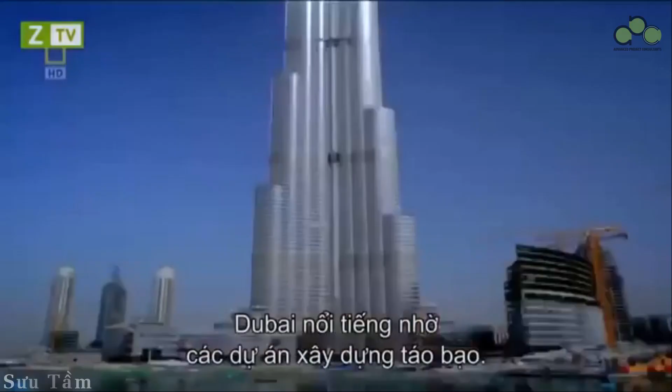Dubai is famous for its audacious engineering projects. But now, its neighboring city, Abu Dhabi, could surpass them all. This is Capital Gate, the most inclined skyscraper on the planet. It defies gravity, leaning at almost 5 times more than Italy's Leaning Tower of Pisa.

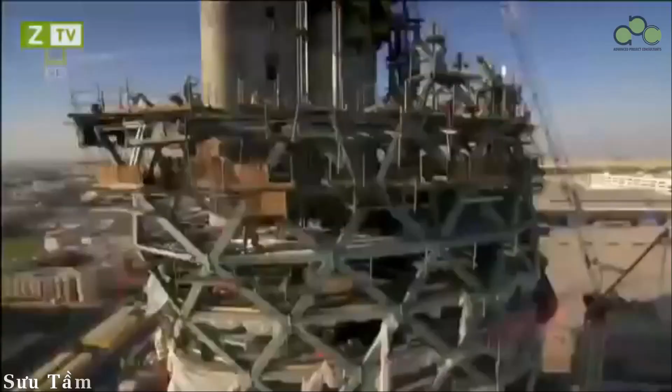To make it stand up, it'll take some extraordinary engineering that could rewrite the skyscraper rulebook.

Situated on the edge of the Persian Gulf lies the Sheikhdom of Abu Dhabi. It's the largest and richest of 7 states that unified in 1971 to form the United Arab Emirates. Abu Dhabi is undergoing one of the biggest makeovers of modern times.

Its ruler, Sheikh Khalifa bin Zayed Al Nahyan, wants to join the City Super League. And he's spending over $200 billion to transform his capital into a world-class business and tourist destination. He's already spent a reputed $3 billion creating the most expensive hotel ever built.

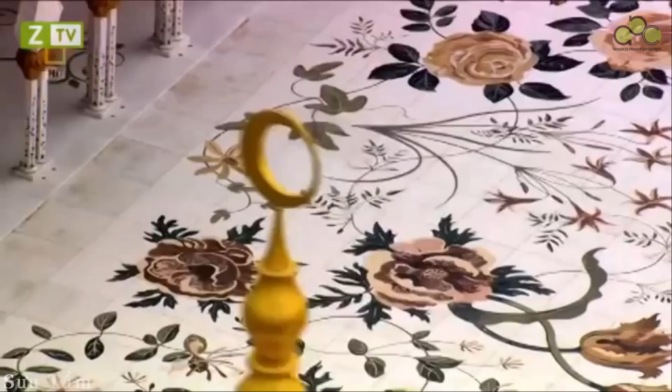The Emirates Palace boasts 114 gold domes and is the height of luxury, where rooms cost up to $12,000 a night. And that's not all. He's built one of the largest and most opulent mosques on earth. Capable of accommodating 40,000 worshippers, the Grand Mosque boasts the largest carpet on the planet and the world's biggest gem-encrusted chandelier. But even these structures have not quenched his thirst for the extraordinary.

Now, the Sheikh wants a building so spectacular it will instantly become an international symbol for Abu Dhabi. The man appointed with the task of delivering this architectural icon is the Sheikh's cousin, His Highness Sheikh Sultan bin Tahnoon Al Nahyan. Architecturally, it will be a unique building, positioning Abu Dhabi as one of the cultural hubs around the world, and architecture is part of that overall inspiration and art.

It's a tough challenge. This is a land where extreme engineering is the norm. Neighboring Emirate Dubai has already built the world's tallest skyscraper, the 828-meter-high Burj Khalifa, and an iconic luxury hotel, the Burj Al Arab. Sheikh Sultan signs up a team of architects and gives them a clear brief, not to go bigger or taller, but to challenge the rules of architecture.

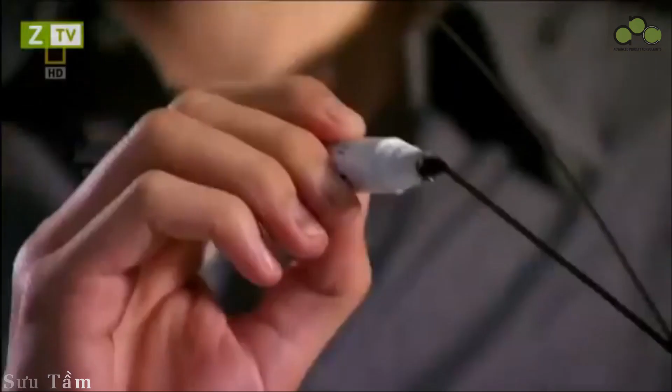The architects look for inspiration in Abu Dhabi's landscape. They find it in the wind-swept dunes and the rolling waves of the Persian Gulf. We took this idea of wind and water, which are both dynamic, fluid type of rhythms of nature, and we said, how can we capture those in time? As a result, you get a much smoother phase. I was really very happy when we first saw it, because with such a building, you can get the first impression from the first few seconds.

The team come up with an extraordinary design. A tower that spirals out of the ground to 160 meters, inspired by a desert whirlwind and the splash of a wave rising over the sand. This gravity-defying skyscraper tilts almost 5 times more than Italy's Leaning Tower of Pisa. No single angle of this tower is the same as another. It's a structure guaranteed to amaze.

We really wanted this to happen. They could see a vision suddenly. They could see something that would stand for them. Then there was no stopping us. Sheikh Sultan wants the lower floors to become the most prestigious office address in Abu Dhabi, with the top 18 levels assigned as a 5-star hotel fit for royalty.

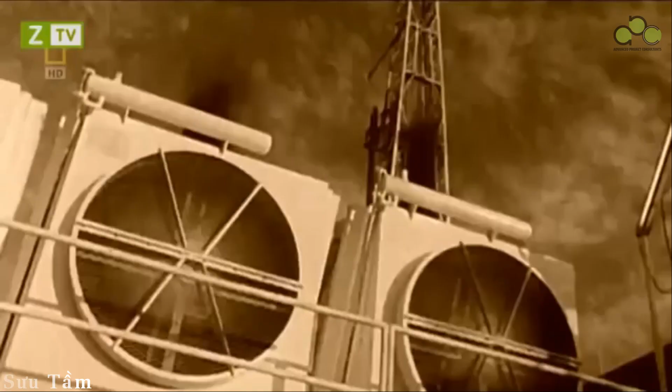Over the past 50 years, this land has experienced extreme change like no other. The discovery of huge oil reserves in 1958 set the wheels of progress in motion. Abu Dhabi's ruler Sheikh Zayed had a vision to unify the sheikhdoms and secure their financial future from Western dominance. He then set about using his black gold to create a city that rose out of the desert.

Today, Zayed's legacy is all around, and now his son wants to leave one of his own. To transform Abu Dhabi once again, but this time to put it on the world map. Sheikh Khalifa plans a new $2 billion business district called the Capital Center, situated alongside the Middle East's largest business hub, the Abu Dhabi National Exhibition Center. It's the ideal location for an architectural icon. And inspired by its location, the new tower is named Capital Gate.

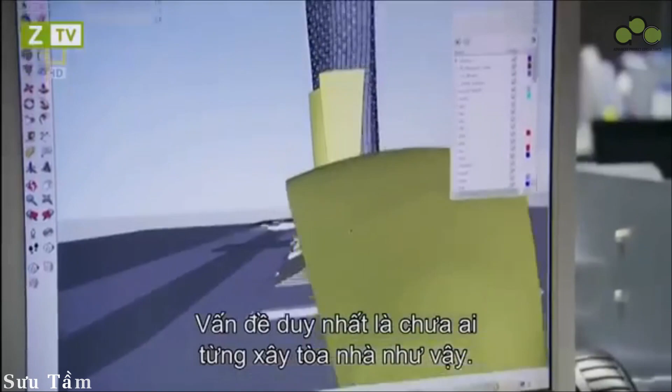Now, the idea must make the leap from the drawing board to the construction site. The only problem is, no one has ever attempted a skyscraper like this before. Everyone realized that this is a crazy structure to build, and how are we going to build it?

To make Capital Gate's gravity-defying design a reality, it'll take some extraordinary engineering, and the challenge begins on day one. Its top floors overhang its base by 33 meters, creating huge forces that want to rip the building's foundations out of the ground.

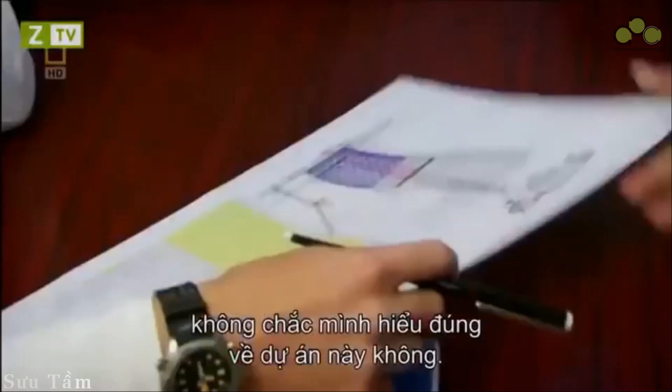At the construction site, project architect Tony Archibald is daunted by the task ahead. When I first joined the job, I was shown the drawings, and I kind of did a double take, and I wasn't quite sure that I got the correct understanding of the project, and it took me a few moments before I realized what we were about to undertake.

Keeping Capital Gate upright is a huge engineering challenge. There isn't just one solution. To overcome the forces of gravity, it will take a whole range of pioneering techniques. But the task starts with the foundations, deep underground. On one side of the building, the weight is going down into the ground. On the other side, it's being lifted out of the ground. And that's due to the large overhang that we're having to deal with.

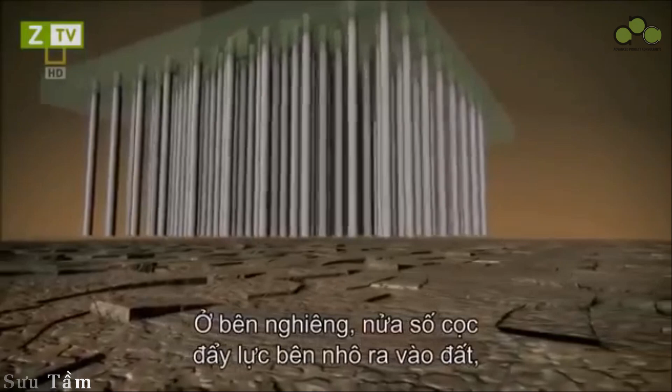The solution requires almost 400 concrete piles that work in 2 different ways. On the leaning side, half of the piles push the overhang's forces into the ground. On the opposite side, the remaining piles anchor deeper into the bedrock. They resist the stretching forces, trying to wrench the building out of the ground.

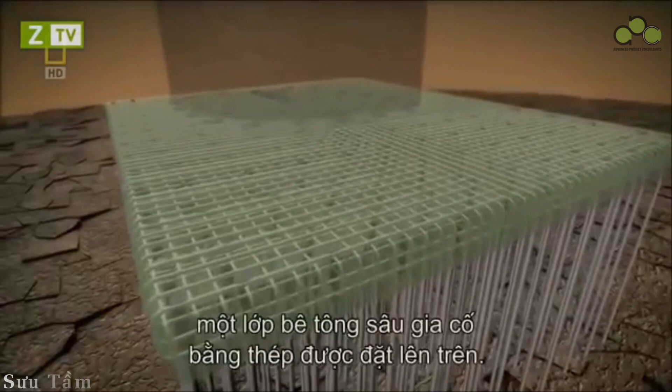Finally, to evenly distribute Capital Gate's forces into the piles, a deep concrete slab reinforced with steel is laid on top. What the foundations taught us is that every single aspect of this building has to be custom engineered.

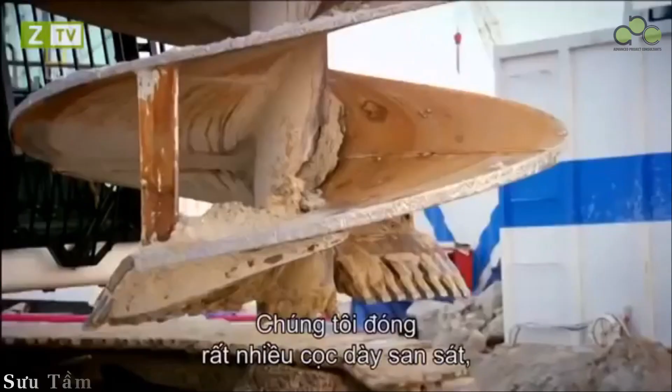Excavators dig out a colossal 6,000 cubic meters of sand. And over 8 weeks, hundreds of piles are driven into the ground. We had an awful lot of piles to put in a very close proximity. It was a real difficult challenge. There can be no let-up on this schedule. Sheikh Sultan wants Capital Gate complete by an impossibly tight deadline.

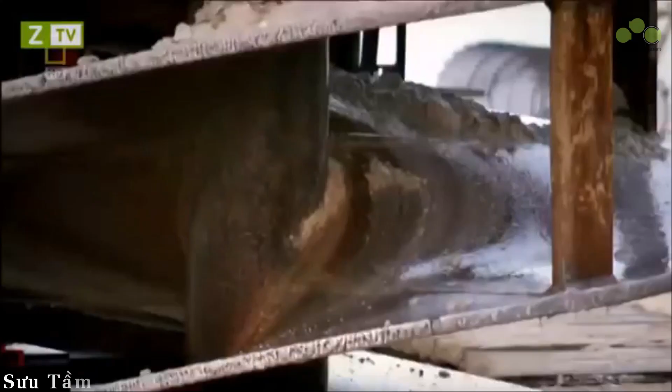With the foundations finished, building above ground can begin. But because of the dramatic lean, it will have to be constructed in a very different way to a conventional skyscraper. We realized once we'd done the foundations that this was going to be the first of many difficult problems. A normal skyscraper requires a solid core to hold it upright. But Capital Gate's curves will just crack and topple a standard core. Engineers must discard conventional thinking and devise a way to defy gravity.

Inspired by the nearby desert landscape and its wind-shaped dunes, architects have designed a curved leaning tower. But it'll take some audacious engineering to stop Capital Gate from falling over. Normal skyscrapers are built around a slim vertical core, which helps to channel the building's weight into the ground. There's so much overhang on this building, a conventional core, there was no way it was going to work. You just can't build a straight core. It's just not strong enough.

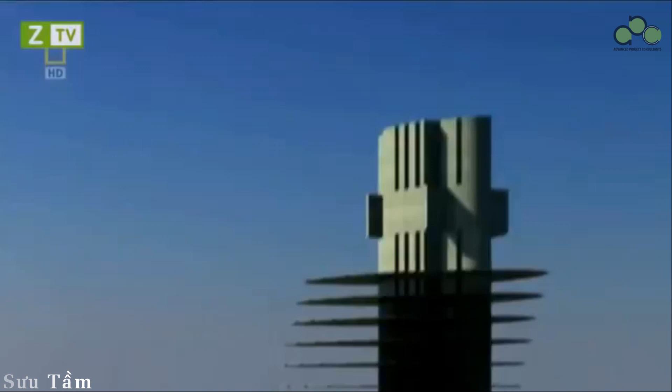Capital Gate's design would cause a conventional core to bend dangerously. The pull of the massive overhang wants to stretch the core on one side, causing the concrete to tear apart.

Structural engineer Mona Vassi knows it's a serious problem that must be solved. When I saw this one, I thought it's impossible, it's not going to work. It's just some sketch, somebody left it somewhere. But I always think that for the architects, it's easier for them to just draw something, but it's not easy for us to fulfill or satisfy their need.

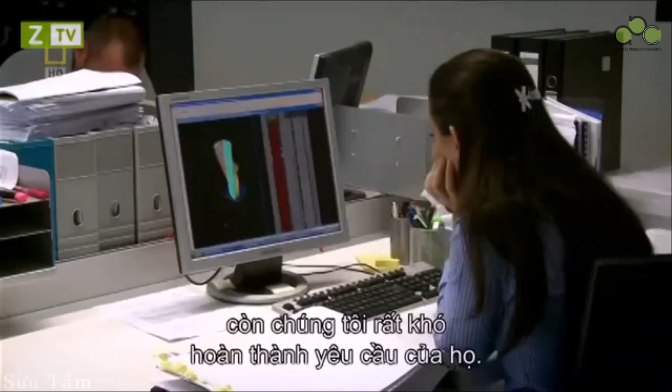The engineers developed 2 groundbreaking solutions. The first part of their plan is to build the core with a curve, bending in the opposite direction to the building's lean. As the structure grows, its weight pulls the core straight. In total, it shifts 350 millimeters, and the effect is significant. The concrete that would have been stretched by the overhang's pull will now be compressed and strengthened.

You build it bent, and then as you add the slabs to the upper levels, it pulls it back into vertical. So basically that whole vertical core is in compression, and that gives it immense strength.

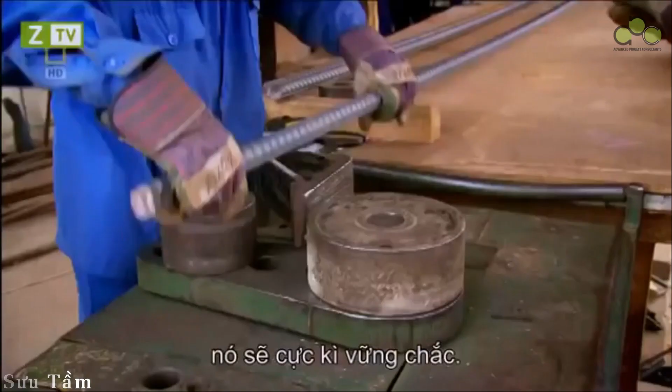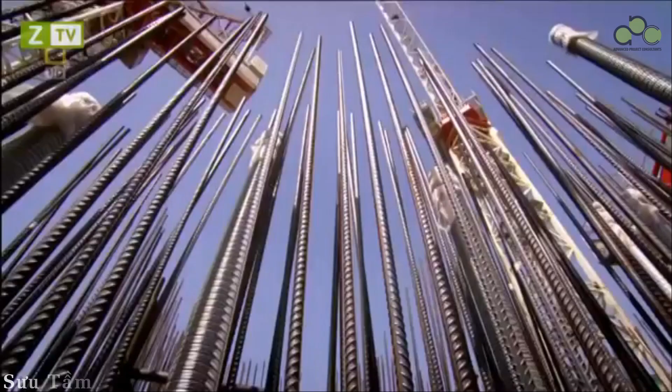The core grows 4 meters a week, and construction manager Les Fairchild is in charge of building it. This is probably the most complex core that I've come across. It's built at an angle, and effectively the core holds the whole building up. The core is built using a technique called jump forming.

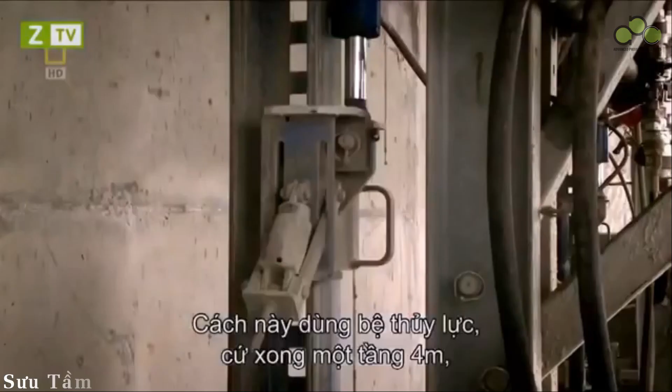First, a dense mesh of steel reinforcement is assembled. A mold then closes around the steel to form the shape of the core. The steel mesh is then filled with concrete. Then the mold or form can climb up the core wall for the process to start all over again. Jump form is a hydraulic platform. Once we've cast each 4-metre level, we simply attach it to some runners and we jump it hydraulically up to the next level.

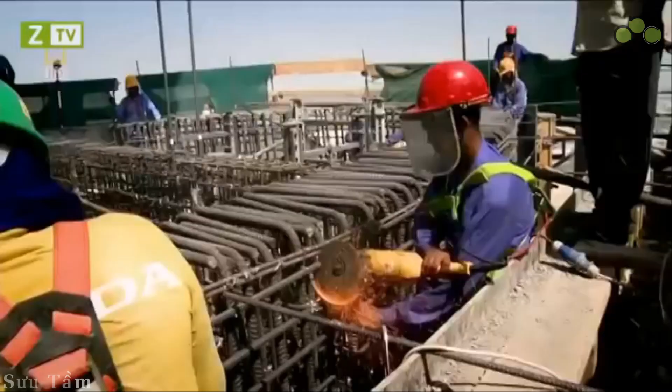The core will be strengthened as it straightens. But for the core to carry extreme loads, the concrete must be reinforced using steel rods called rebar. The rebar is installed during the daytime, but temperatures of up to 50 degrees Celsius and concrete don't mix. It dries too fast and could crack. To set at the right speed, the concrete has to be poured during the cool of the night.

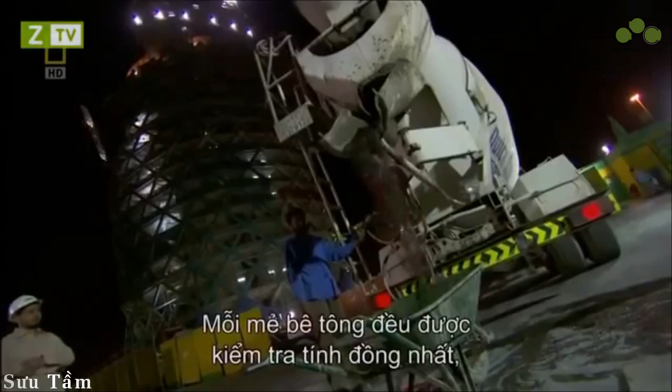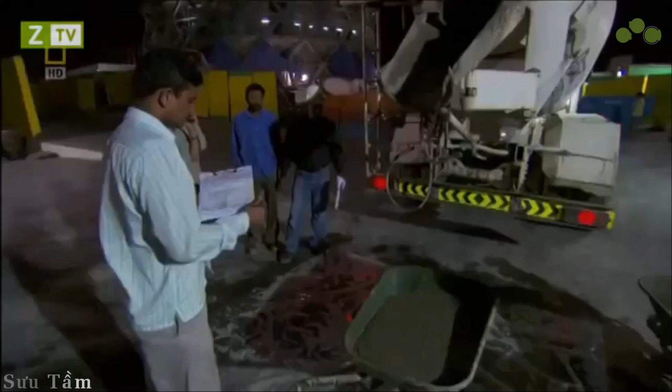As the core grows higher, the liquid concrete has to be pumped over longer and longer distances. So the consistency of every batch is first checked in a slump test to ensure it won't block the pipes. When you first see it coming out the wagon, you can usually tell whether it's a tight mix or whether it's a loose mix, and that's what we're testing for really in the slump test. We simply make a cone, lift the cone off, and depending on how much it reduces in height, tells you exactly what the slump is. The one we just witnessed is 215 millimetres, which is within the specification, so that's good to go.

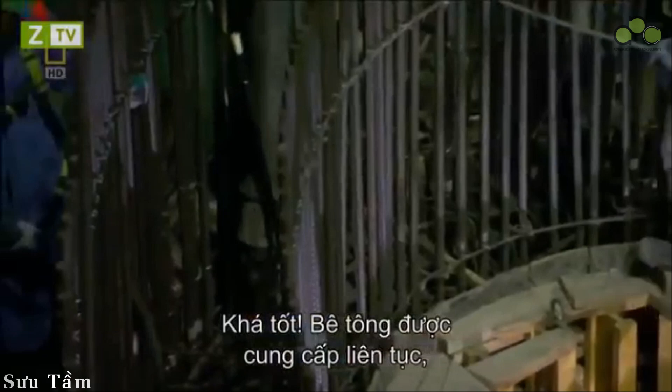Whilst the truck drives to the pump, Fairchild needs to get onto the core. He can take the stairs, but 90 meters up is a long climb. He knows a much faster way. Crane lift. It's going fairly well. We've had a nice continuous supply of concrete, and we're now pumping it up to the upper levels of the building. And the lads are just steadily working away. They actually work from one side to the other in metre deep layers, so they're doing everything right. It's always exciting when we pour concrete. It means it's another achievement really. We're going up another level.

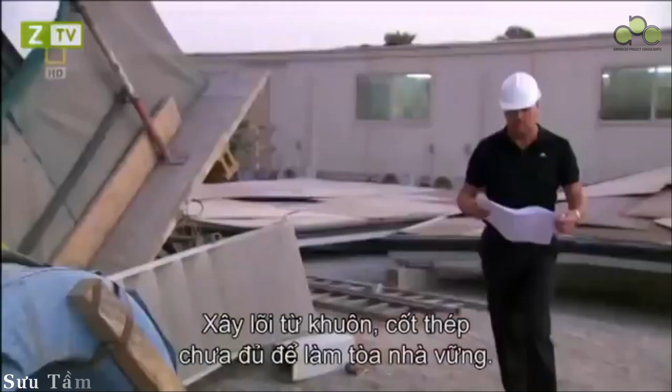But building the core out of alignment and packing it with rebar still isn't enough to stop gravity toppling Capitol Gate. What we came up with is a post-tensioning solution where we introduced much more reinforcement into the core wall and then used the tensioning process. Basically that was done by introducing high tensile strands to the centre of the walls. When we reach the designated height, we simply apply tension. We're actually stretching the tendons that fall through the wall, and we're actually pulling them tight, and that's done by a tensioning machine. So effectively, when the tension is complete and the load was applied, the core would stay intact, and the additional reinforcement would prevent it from falling over.

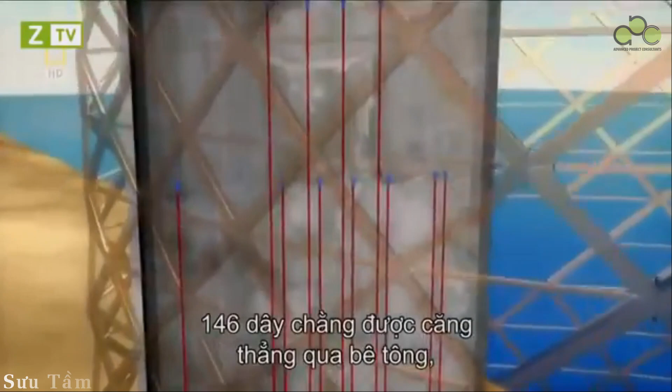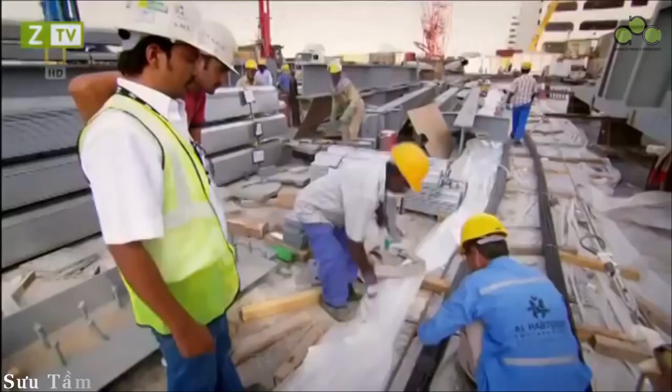To post-tension the core, 146 steel tendons are threaded vertically through the concrete. Each tendon is 20 meters long and runs through 5 floors of the building, overlapping each other for maximum strength. When the tendons are stretched, the stress counteracts the pulling force created by the massive overhang, stopping the concrete from tearing apart. On site, the team are post-tensioning the core. But no one has ever attempted this vertically in a skyscraper.

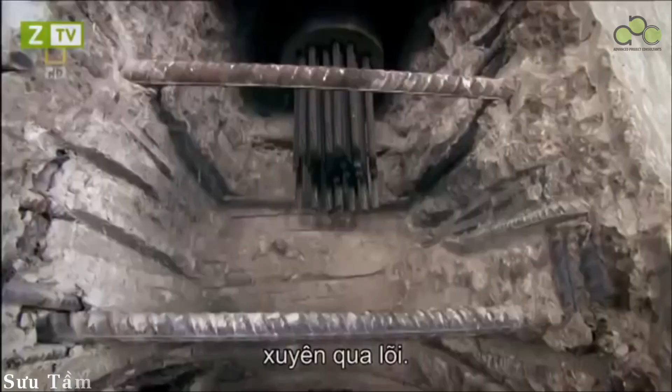The long tendon is lifted to the top of the core. The team used the steel tendon's weight to force it through a duct already cast through the core. Once the tendon is in position, the team lock off both ends, ready to tension its individual strands. A pneumatic jack clamps around one strand at a time and stretches it. It's equivalent to about 5 family cars pulling on one end of the rope.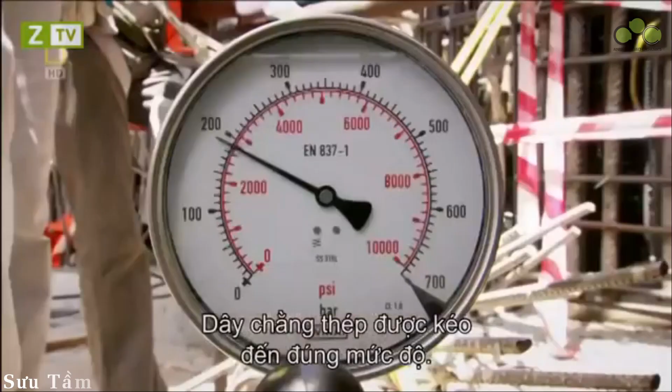With the steel tendon now stretched to the right stress level, concrete pouring can continue upwards. The quantity of cable that's been used is approximately 120 tons and 120,000 metres in length. It's about 44 times the Golden Gate Bridge. This process is repeated over and over and means the core should withstand the huge loads generated by Capital Gate's extreme overhang.

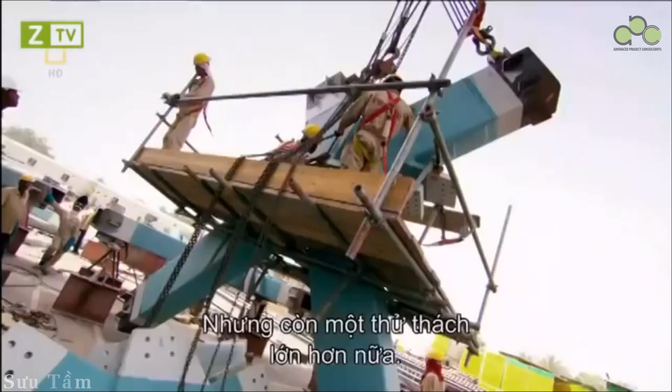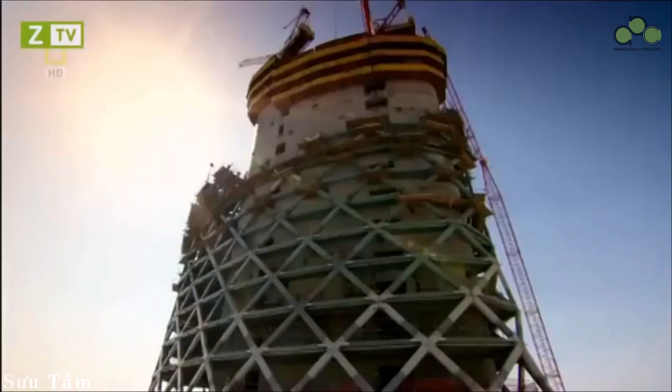But now, an even greater challenge must be tackled. The building's twisting, leaning design must somehow be turned from theory into reality. And once again, it'll mean bending the rules of architecture. To create Abu Dhabi's architectural icon, Capital Gate needs an exterior curved leaning frame. But once again, the building's extreme tilt creates a problem.

The shape of the building with this very pronounced overhang meant that traditional skyscraper building solutions just weren't going to work. There was no way. The building design requires it to be thin to maximize floor space and allow for huge panoramic windows. Irfan Ahmed is one of the engineers who has to find a solution. For structural engineers, always it's challenging to accept the architectural requirement, you know. They always want thinner and thinner and thinner.

Surprisingly, the humble chicken could help with this engineering dilemma. It is essentially a skin of structure around the outside of the building, not unlike an egg. An egg can withstand huge loads because it evenly distributes forces down through its shell, which means the shell can be thin, creating more space inside. So it's very, very thin, it's very, very strong. If I try to crush this egg, you can see that it's actually amazingly resilient. So let's see how resilient.

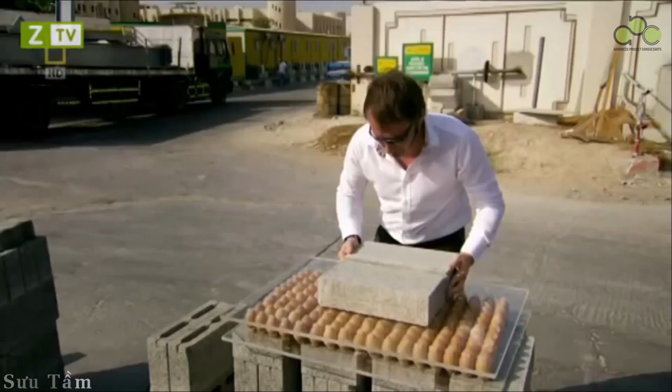Here I have 170 eggs laid out, and we're going to put load on top of these in the form of breeze blocks. Moment of truth. So far, so good. Each one of these blocks weighs 15 kilos. So we've nearly got half the weight of a car on here now, on our 170 eggs. Let's see how far we can push this.

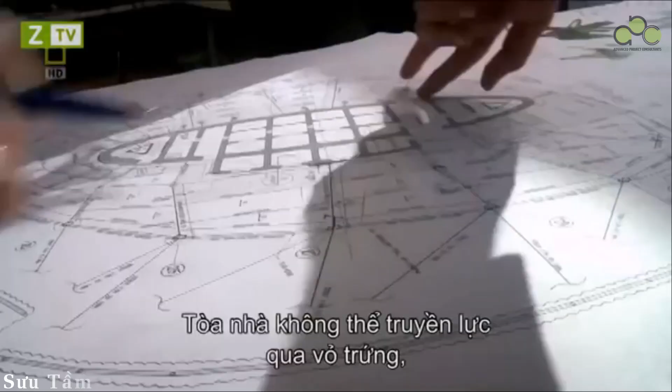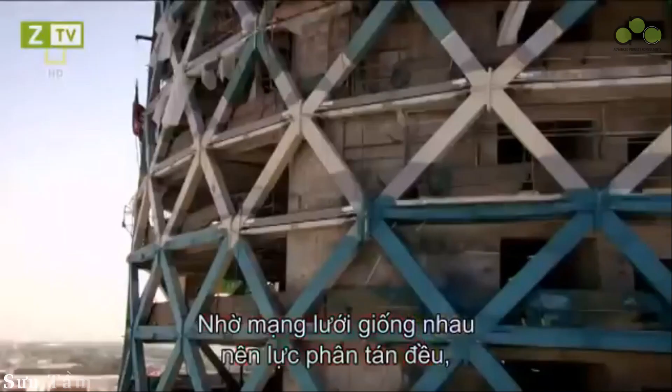Capital Gate can't channel forces with eggshell, but it can use the principle of how it works, using a diagrid. A diagrid is a giant mesh of steel that wraps around the core. Steel beams connect to a node or joint to form a cruciform section. 720 uniquely shaped sections link together to form the thin but immensely strong diagrid. Working together, these cruciforms equally distribute the forces down the outside of the building. The way it does that is by making a uniform net, so that the forces are very evenly distributed, and that means that we can get away with slenderer sections.

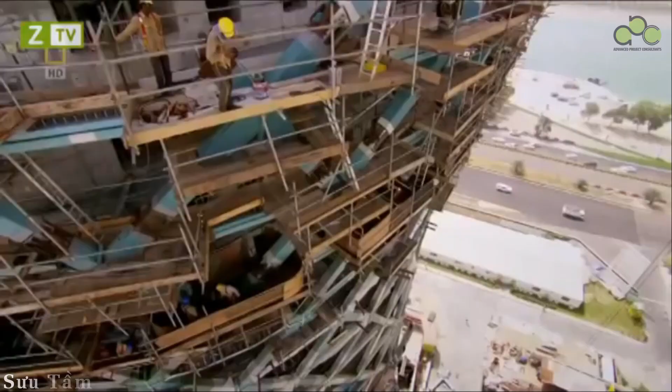On site, a team of 240 steel fabricators assemble the diagrid. They've built the easier straight part of Capital Gate's base, but now the structure is starting to lean, making installation even more challenging. Each cruciform, weighing up to 16 tons, has a unique geometry and must be crane lifted at a precise angle. If the diagrid is not assembled with millimeter accuracy, the mesh will not channel the loads and the structure could be weakened.

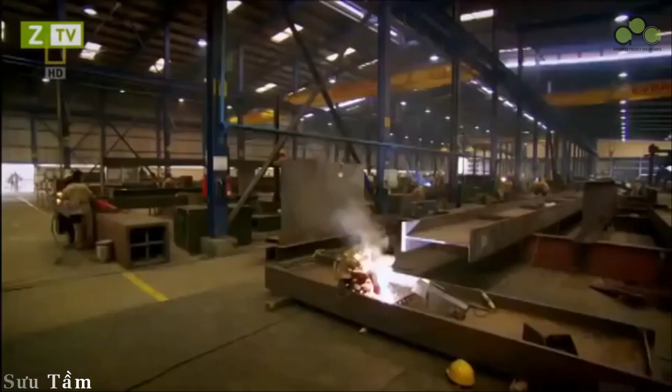The engineers must communicate closely with the expert steel fabricators. They design and manufacture the diagrid 150 kilometers away in the neighboring emirate, Sharjah. Here, cutting-edge construction is the norm. They've built one of Malaysia's Petronas Towers and Dubai's iconic skyscrapers, the Burj Al Arab and the Burj Khalifa. But Capital Gate's revolutionary design pushes even these experts to the limit.

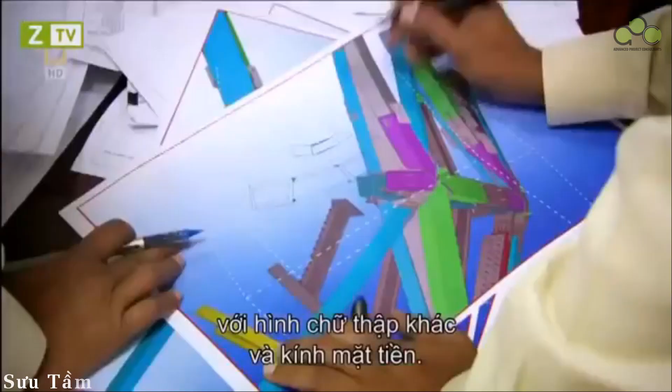On the planning floor, project engineer P. Bhaskaran and his team need bespoke 3D software to tackle the building's highly complex diagrid. The 3D modeling is done, and any unforeseen criticalities will be very clearly identified in the 3D model. Each one of the 720 cruciforms is precision engineered, not only to channel huge forces, but to connect with millimeter accuracy to the neighboring cruciforms and the glass facade.

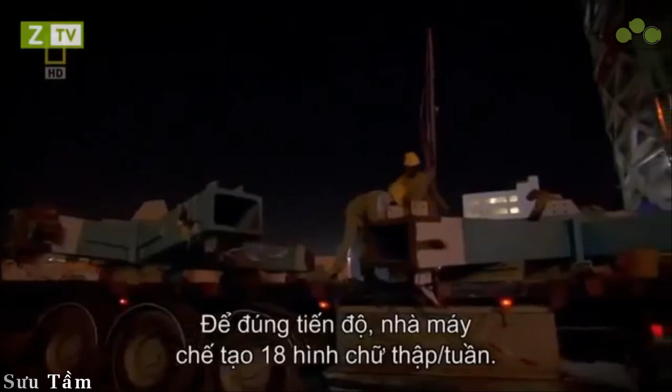But to measure their exact angles, the team used some old-school technology. Chalk. It might look unsophisticated, but it's highly accurate, ensuring all the elements will join together. To keep up with construction, the factory must produce 18 cruciforms every week. Constructing such a huge building, and a critical building within the short span, without working 24 hours, it is absolutely not going to happen. As the skyscraper reaches new heights, the long hours start to pay off.

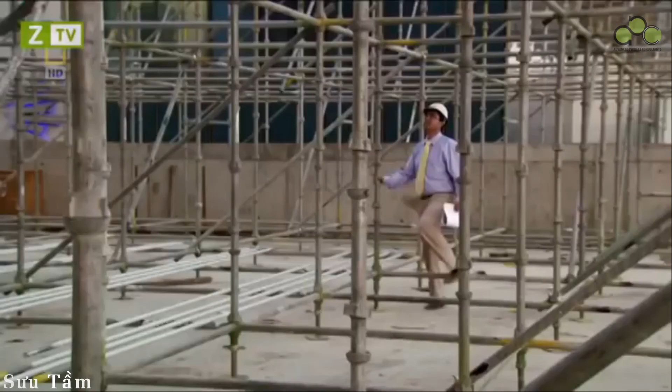This design pushes the diagrid technology to its absolute limit, and in fact far beyond what's ever been achieved so far. Even in your dreams, you're thinking about this project. So once you see the structure coming up, you forget all the long hours you spend and all the sleepless nights. A colossus is fast emerging from the Abu Dhabi sands. Now, this leaning tower must be clad with a glass facade. And as always with this gravity-defying structure, it's going to require some revolutionary engineering.

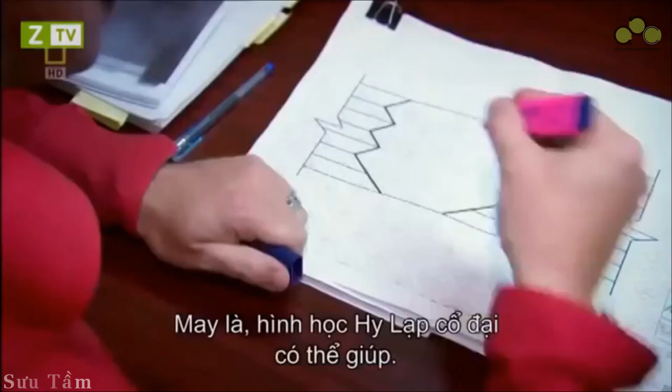Glazing Capital Gate's leaning curved frame is a major problem. Covering its unusual contours with curved glass will blow the budget. So the skyscraper's curves must somehow be clad using cost-effective flat glass panes. Fortunately, ancient Greek geometry can help.

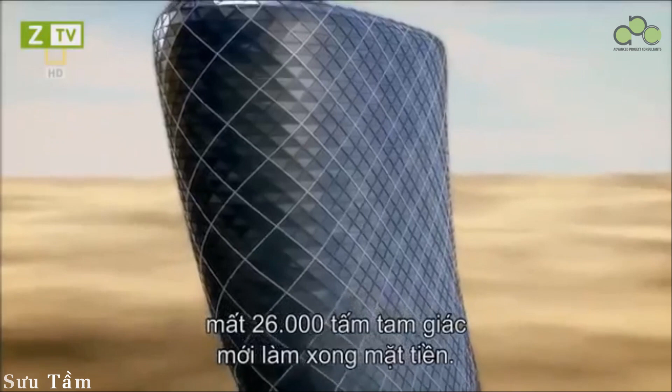Because you've got a complex shape, it's an organic shape, it's a curved shape, the only way to model that with straight lines is to use triangles. Triangular panes can pivot in 3 directions, and when joined together can cover complex geometric surfaces. But because every angle of the building is unique, it'll take 26,000 triangular panes to form the facade.

With so many glass triangles to cut, the local glass factory springs into action. Each pane is scored by an automated diamond cutter to an exact pattern. The triangles are then sent along the production line. The team is under constant pressure to deliver enough glass to the site.

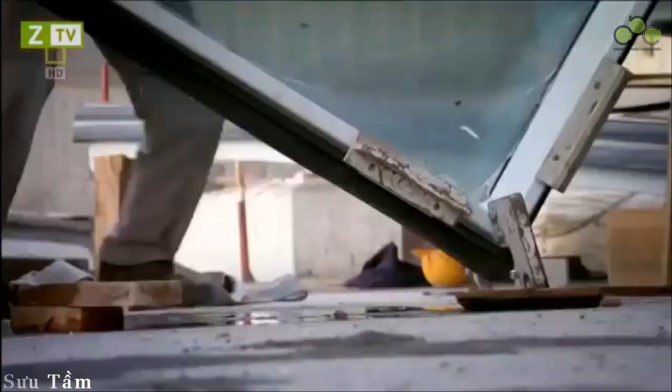Hey, this side, you guys, hold it.

After several weeks, 8 diamonds are in place and another 100 standing by. But the glass design is so unconventional, it still has to pass a number of tests to prove it's up to the job. Because we'd already started the glass installation, the results of this test were absolutely key. Each panel is stacked one upon the other. So if we'd had any kind of problem, we would have had to unstack them, which would have had disastrous consequences for the program.

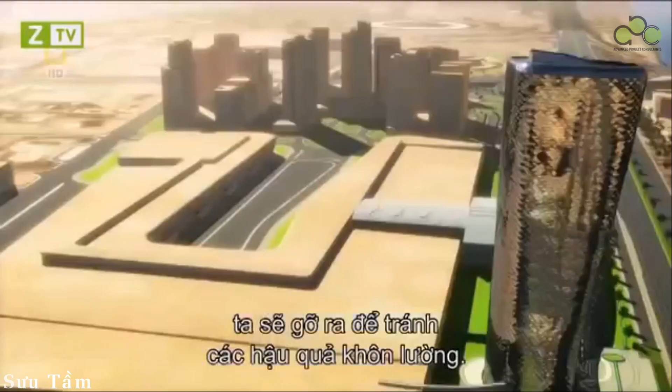This is no ordinary glass skin after all. Capital Gate's core straightens as it grows. The skyscraper will not stop moving until after completion. Normal glass facades can accommodate minute movements caused by wind and temperature changes. But to stop the glass shattering and keep the building watertight, the panels must be designed to shift by up to 20 millimeters. The scale of that kind of movement is almost unheard of in glazing systems. It's a vast amount of movement.

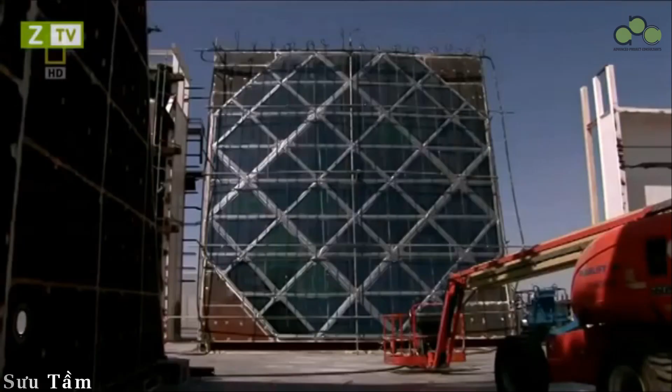With glass installation ongoing, construction manager Craig Rooney needs to know the panels will perform. We don't want to get to the top, we've done it, we've installed it, we think we've done a great job, and then it all leaks. The panels must be tested to the limit at a Dubai laboratory. A plane engine and many litres of water simulate worst-case scenario weather. Now the moment of truth. Any leaks could be a disaster.

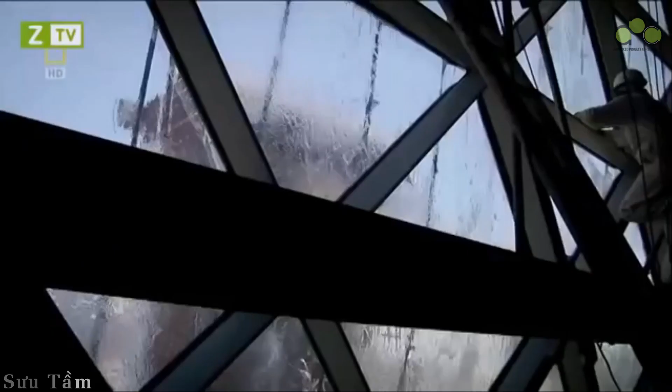And it's bad news. The first time we got a full water test, we had a leak. The fact that we had a leak was devastating to the whole team and very alarming. The diamonds connect to each other by a bespoke two-layer seal. The flexible spongy seal allows the diamonds to move and keeps water out. But if any water does seep through the outer seal, drainage tubes fitted at intervals let the water flow away.

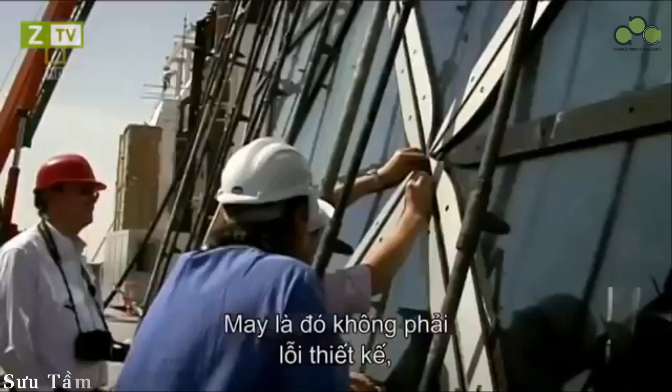The panel has failed the test. Water has flooded inside and penetrated the inner seal. If it was a fundamental failure, we're back to the drawing board, so the cost and the budget and the programme all go completely out the window. The panel is examined. Answers are needed fast. Fortunately, it's not a design failure. They discover a drainage tube is only blocked with sand. The problem resolved, installation can step up a gear.

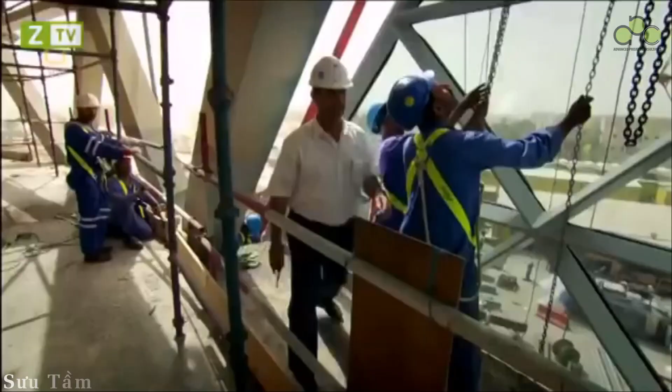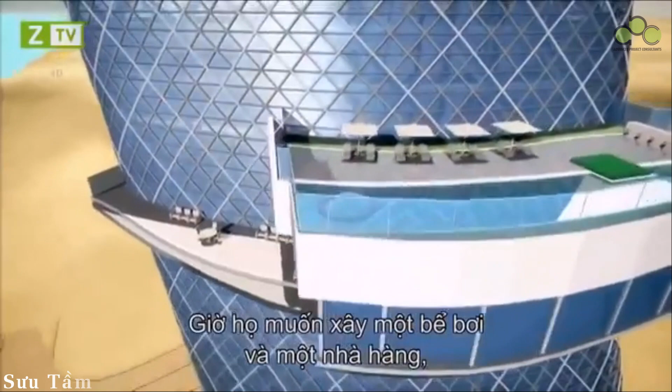But as always with this audacious building, one problem is solved and another is just around the corner. To give Capital Gate's five-star hotel lobby the wow factor, architects again plan to push the design to the extreme. Now they want to build an infinity pool and a restaurant, hanging 100 meters above the ground.

18 months into the build, Capital Gate's design is about to give a new slant on high-rise living. The architects want a pool deck and restaurant suspended in the sky, but it's an engineering headache. There's so many requirements that architects have that really put us in so much trouble as engineers, but you want to make sure you have a safe structure. The design calls for a two-story extension, hanging without any visible support. But the pool's water alone will weigh 150 tons.

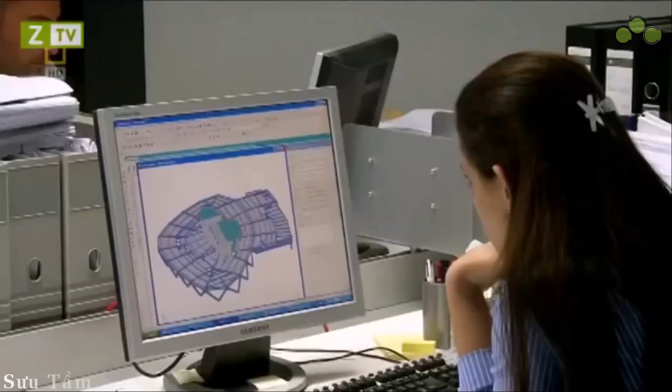The structure's huge mass means it needs reinforcement. We needed some supports from below, otherwise there was no other solution. I don't think you can have a cantilever that huge on this building, no way. The design will only work if it's underpinned with 22 steel struts. They will carry the loads back into the building. But the struts must also look delicate to meet the architect's aesthetic demands.

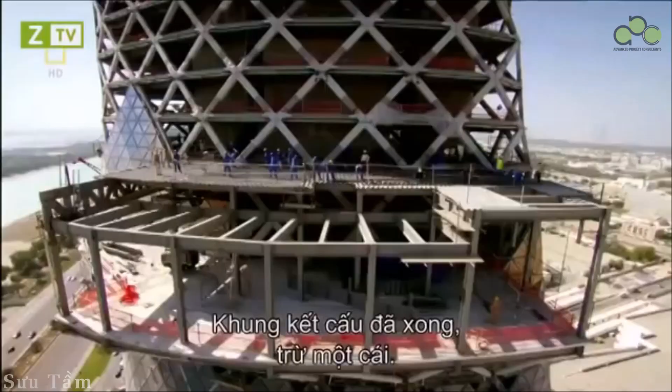On the construction site, 90 meters up, the pool and restaurant is taking shape. All of its structural elements are in position, except one. The team are raising its last 6-ton floor beam.

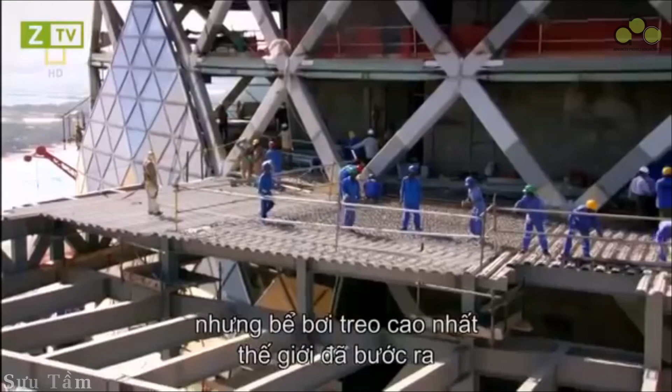And the structure's muscular struts and connections are also elegant. The idea behind these junctions is that they behave like the insects that can walk on water. They're sufficiently light that the surface tension keeps them above the water. So these little brackets dissipate the forces from all that weight.

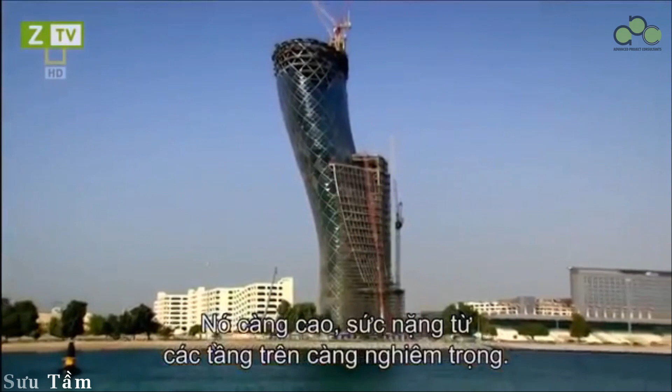Capital Gate is fast becoming an Abu Dhabi landmark. But the taller it gets, the more the weight of its upper floors is a problem. The skyscraper needs to go on a diet. And this time, the architects come up with a clever solution. The building has lots of visual surprises.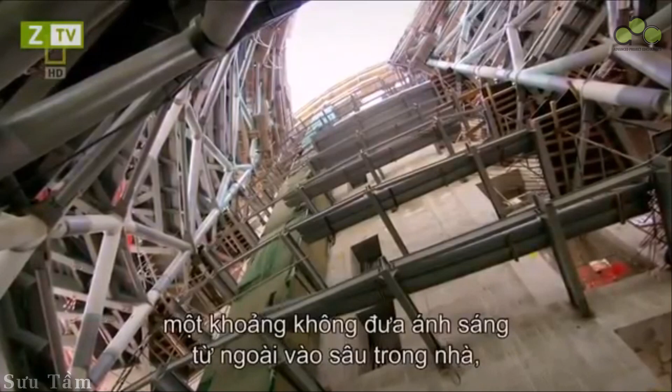And one of the most important ones of those is the internal atrium. It's a kind of a light well that brings light from the sky deep inside the building, and it extends over half the height of the building. So it starts out very, very small at the bottom and opens out in a big funnel. This cavernous hole is good news for reducing weight and minimizes forces.

But the atrium is a double-edged sword. The floors are critical in transferring loads from the diagrid to the core. A giant hole through 18 floors means these loads must find another pathway. It's a very, very big hole in every single floor plate. So our engineers really have their work cut out.

You don't want to have an opening in your floor. You want to have more concrete, reinforced concrete, to transfer these forces. The forces need to flow away. And the solution is pioneering. An internal web of steel mirroring the external diagrid. This is the first time we've ever heard of this being done. The internal diagrid is actually a fundamental part of the structure.

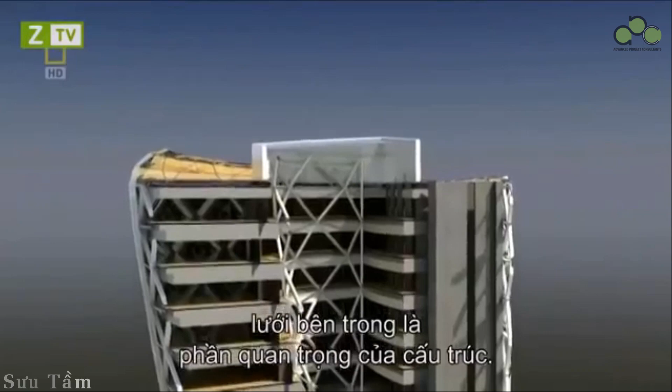This funnel-shaped internal skeleton carries the forces of an 18-story building down to its tapered base and into the core. But the loads are extremely high for such a small area. To stop the atrium punching through the core wall, the concrete needs protection. The answer? 6 giant plates of steel that brace the connection to the core wall.

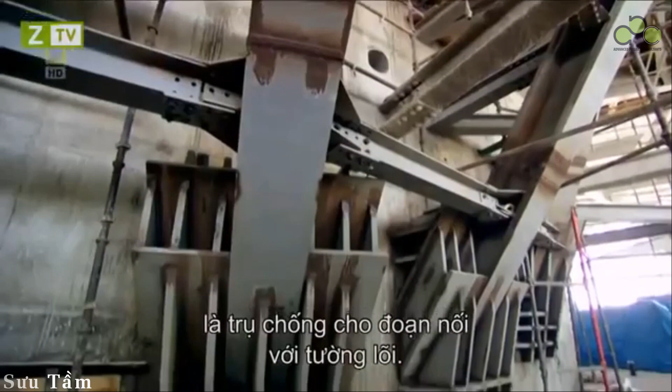The connections are really a wonderful, wonderful piece of engineering. They're 8 meters high. They span 2 floors, and they connect back into the core. The atrium's near completion brings Abu Dhabi one step closer to achieving an iconic landmark. But as the sun goes down, this isn't the only celebration underway.

On site, the Indian steel team are holding an annual blessing to the Hindu god Lord Vishwakarma, the protector of architects and engineers. Their livelihoods depend on staying safe, and although they use safety equipment and are highly skilled, working with huge sections of steel at height is never risk-free.

We pay our respect to God and get the blessings from the God. We do that for the safety of all our workers and for the proper completion of the job. Every trade of workers, the basic tools they are using on site, has to be kept in front of God, and the workers feel that they are in safe hands. The tools are now blessed, and the steel team's morale is high.

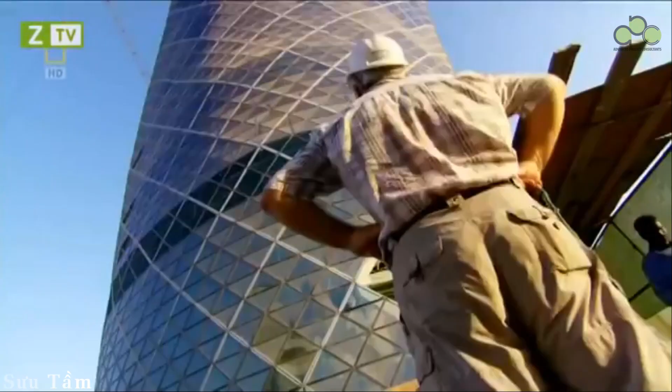But the glass installers, lifting diamonds to over a height of 100 meters, are getting the wrong kind of lift from Abu Dhabi's highly unpredictable wind. If the wind is too strong, then you can feel this in your hands when you hold these diamonds by rope. I always get nervous if I see the panel starting turning. And this makes me always a little bit afraid when I see diamonds going up and starting moving.

Meyer has to act quickly, or this 4-ton diamond could smash into the building. Not for the first time, lifting glass is delayed by changeable weather. At this rate, Meyer won't install the remaining 107 panels in time. But Abu Dhabi's wind isn't the only problem the Capital Gate team face. A last-minute design request comes in from the Sheikh's office that could have serious implications.

With just 6 months to go to completion, the Capital Gate team should be on the home straight. But those plans may have to be put on hold. I had a telephone call saying that we had to put a helipad on the roof, which I thought was a joke, but I was astounded that we got this at such a late point in the project.

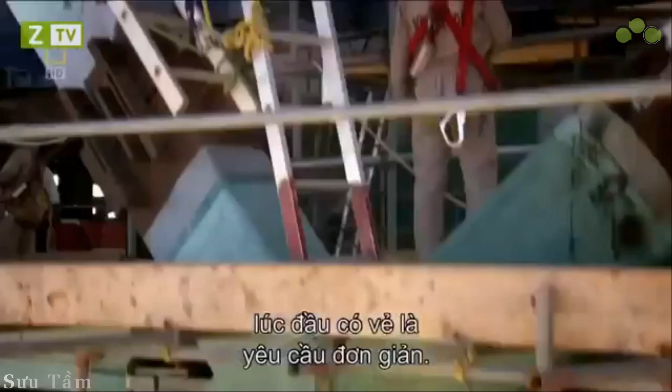Integrating what will be Abu Dhabi's highest helipad atop one of the world's most daring skyscrapers at first seems a simple request. But it actually poses 2 serious problems. It'll create new forces that must be absorbed by the already strained core, and unpredictable wind flows that can cause potentially lethal flying conditions. You get a thing called wind shear, tipping the whole helicopter onto its side, and this is a very real and very dangerous risk.

These rapid wind changes, known as wind shear, can affect the lift on helicopter blades. Aircraft can be blown off course, or literally fall out of the sky. There is no way that we could have any margin of error on the safety. The only way we could predict what the wind shear would be like on the top of the building was to model it in a wind tunnel.

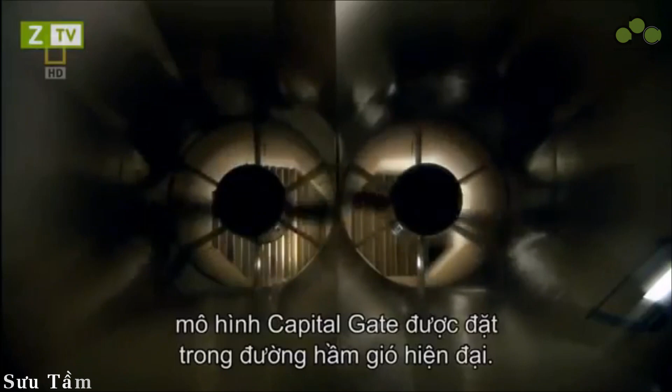In London, England, a scale model of Capital Gate is put through its paces in a high-tech wind tunnel. Just as the team fear, within seconds, wind shear conditions appear. Air currents are flowing over the top of the building, but then separate from the surface, spiraling inward to form a realm of turbulence. Wind engineer Leighton Aurelius knows the consequences could be serious. If the pilots lose control in this random ball of energy here, they may in fact end up crashing onto the helideck, or even worse, onto the tower itself. I'm sure that can occur.

But that's not all the wind tunnel test reveals. Wind impacting the helipad is also creating huge suction forces. We're talking about very large forces here wanting to pull the helipad off the top of the building. Something in the realm of several large trucks or big rigs trying to pull this helipad away.

To make the helipad safe, Aurelius and his team have to go against conventional thinking. We didn't think that lowering the helipad was actually going to be the optimum design, but we see reduced loading on the helipad as well as safer conditions for the pilots to land in. Lowering the helideck to just 2 meters above the roof dramatically decreases the wind shear threat, and means Capital Gate's core will withstand the additional loads.

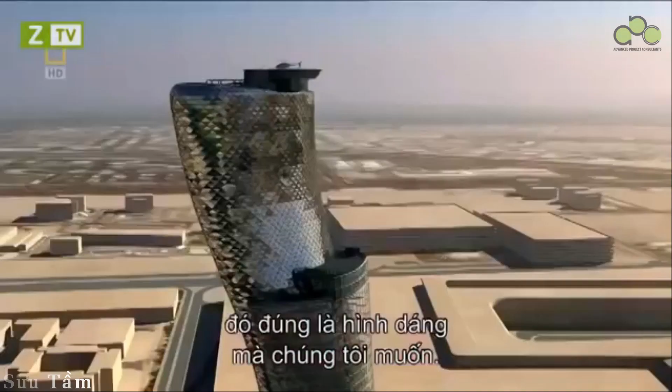We're relieved, frankly. The tests have actually confirmed now that we can actually have it in our original design position, which is very low, which will mean that the profile on the skyline is exactly where we want it. But it'll take another 5 months to just draw up the helipad's blueprints, and a crane must be left behind to build it.

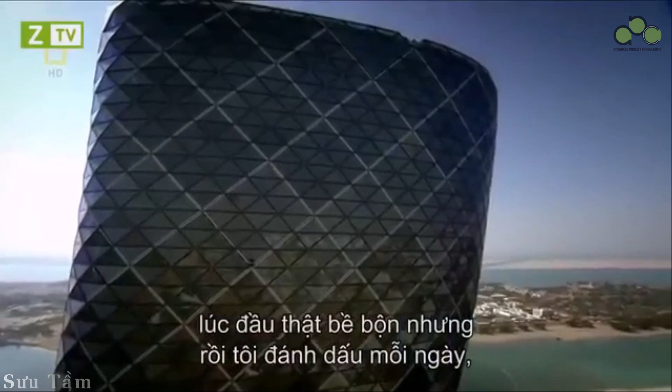Now, with only weeks to go until 0 hour, the team are installing one of the last glass panels. It's a moment that once seemed a long way off. In my office I have a plan of all the diamonds we have to install, and in the beginning it looked like I'm in jail and I'm marking the wall with marks for each day. And so at first I felt I will never finish this project. Just 10 months since the first diamond was fitted, the facade now shimmers in the sun.

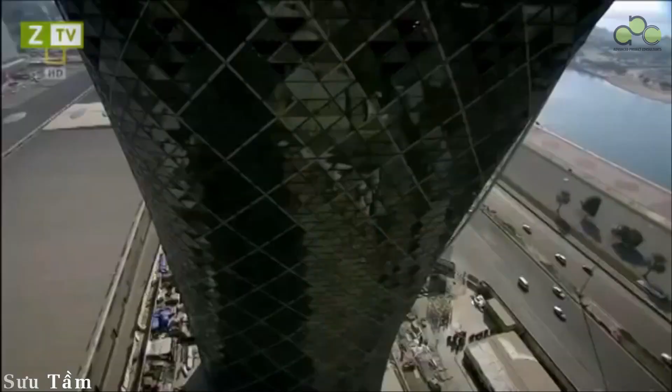Capital Gate's internal fit-out will take another year. Only then will its 5-star hotel and Abu Dhabi's most unusual office address be open for business. But against the odds, the team have created one of the most extraordinary megastructures on the planet. Capital Gate twists and spirals out of the ground, soaring to a full 160 meters. It's taken nearly 6 million man-hours to construct, and its overhang is spectacular.

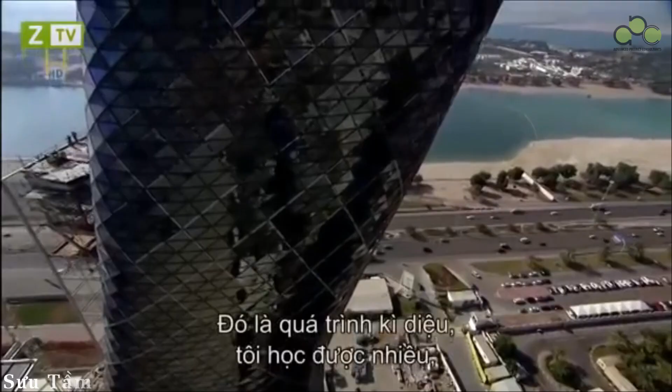You see the building and you stand underneath the overhang. It's extremely impressive. It's a fantastic feat of engineering. I feel as though I've been here an eternity, but it's probably been the quickest 2 years of my life. It's been an amazing journey and we've learned so much. And actually I think we've demonstrated that some things that looked impossible or even ridiculous were actually possible.

And Abu Dhabi's past will soon be physically linked to its future by a wave of steel that'll rise over the grandstand and splash up the skyscraper's mirrored glass. Abu Dhabi is a fascinating part of the world to be at the moment. It says to people we can step outside of the box. We don't have to follow the rules.

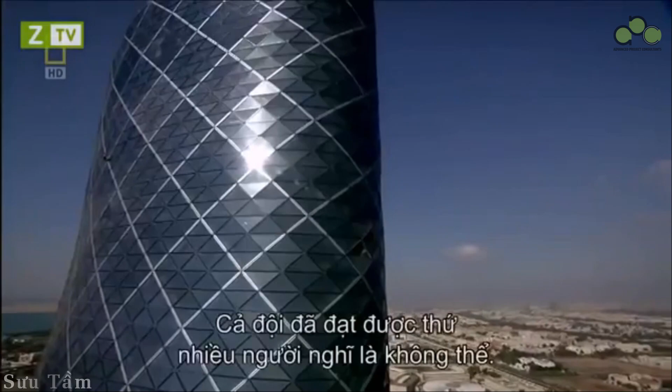With the 2010 World Future Energy Summit just weeks away, Sheikh Sultan can be sure Capital Gate will show the world what Abu Dhabi is capable of. This building is really iconic. It catches the spirit of Abu Dhabi and will be part of the postcard image of Abu Dhabi. The team have achieved what some thought was impossible. A leaning tower that claims the world record for the most inclined skyscraper on Earth.